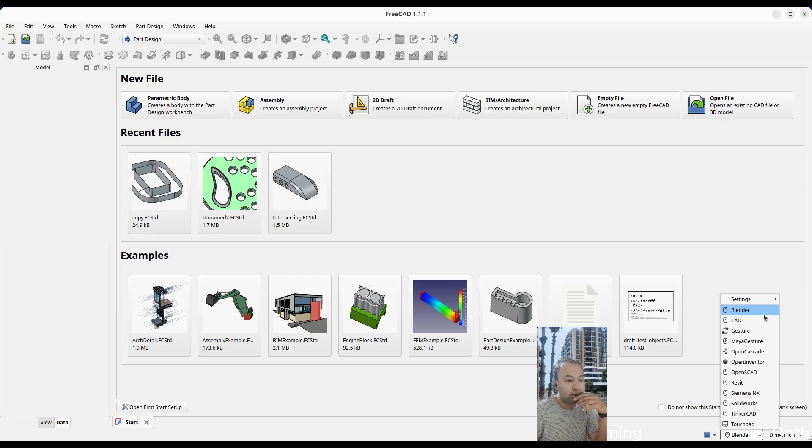First thing, when you open up FreeCAD, you'll be setting it up - customize it to your liking. At the top, if you hover the mouse here, you can see I have currently selected the Blender style of navigation for the 3D navigation. You can click here and choose to your liking which one you like - if you like SolidWorks style, you could choose SolidWorks. I like Blender style, so that's what I've chosen. Also, in the dimension settings, you can choose what kind of standard dimension units you're gonna use for your design and drawing.

So I leave it to the standard, which is millimeter kg, and here as well, so you don't have to worry about that one.

The first and second thing you'll be doing is going to the edit menu and then the preferences, and go to the general tab. I've set the number of decimal places to 3. I'd like to work at 3 decimal places, like a microns level, since my background is mechanical engineering. If you're a civil engineer, the default is 2, but I guess 3 is a very good number for this software.

Then in display and 3D view, you want to turn on anti-aliasing if you have a good graphics card. This software isn't very heavy unlike other commercial CAD packages, so it doesn't require a lot of horsepower for your graphics card or CPU. You can boost some of the settings for anti-aliasing - if your computer can handle 2, set it to 2. I set mine to 4, though I could even set it to 8. Anti-aliasing affects how the shape looks, so it doesn't have jagged lines.

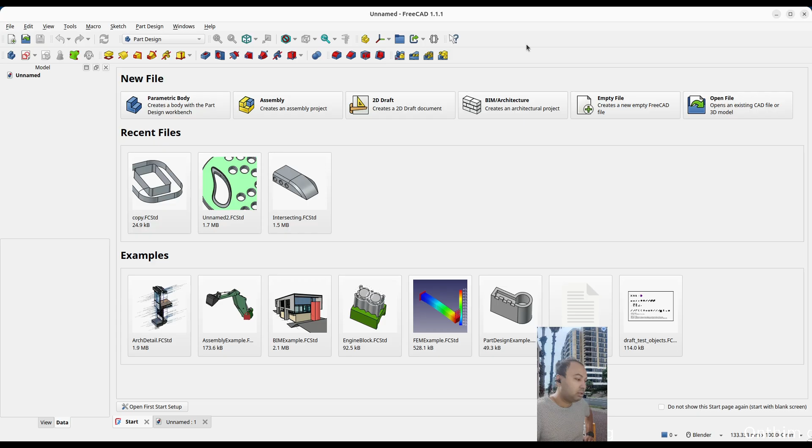And then you can go to the start page - this is just the introduction page. I can switch between documents, let's say I'm working on multiple documents, they'll all show up here. So it's very easy to switch between different documents in this software. Even though the interface looks a little old school, it's very convenient.

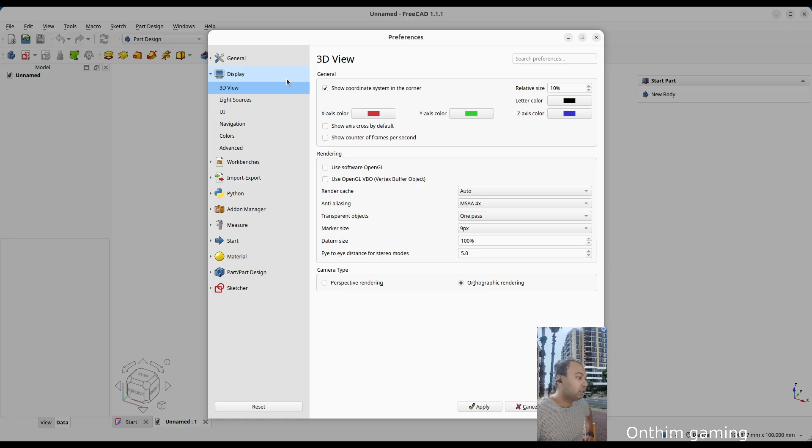As you can see, I have the navigation cube here at the bottom left. I forgot to show you something for the navigation cube - you can check this option, enable spinning animations. I like that, so when we change to, let's say, top view, it will be animated nicely.

Since I'm using Blender, I could use the middle mouse button or scroll button to rotate my view. As you can see, the cube is also rotating. I can choose front view. This is the viewport where the 3D drawing will be created.

So if you're working on 3D mechanical design, what you have to do is use different workbenches that are available. A workbench provides tools for you - you can think of it like different garages or different labs where you'll find different tools available. So a workbench is kind of like a lab, and each workbench has different tools available to you to work on your project.

So you can switch between different workbenches, go into different labs or workshops to work on your part or design. You can bring that part to different workshops on different workbenches, or labs.

So here, if you click in here, you can find all the different workbenches available. By default, there are a number of workbenches available. You can add new workbenches as well. That's the beauty of FreeCAD. If you go to Tools and Add-on Manager, it will connect to the internet and show you all the extra workbenches available for you to download and install.

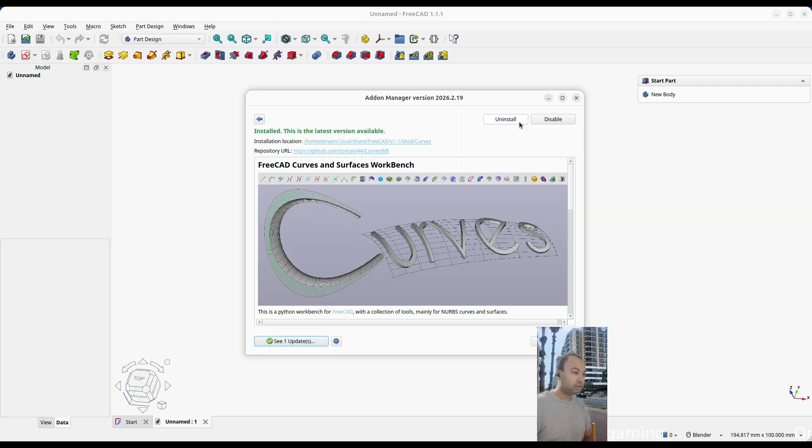So here you can search. This is still loading. Once it's loaded, I can search in the search box. I'm searching curve here. So Curves workbench, I have installed that one. That is a very important workbench if you're working with curves or organic shapes. It's kind of like a surface workbench in FreeCAD. Surface workbench, surface module. In SolidWorks, it's called module, I guess.

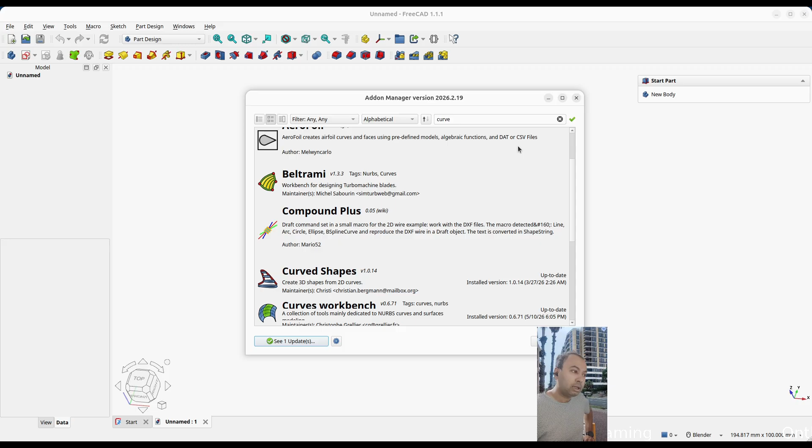So Curves workbench is a nice one. It's not installed by default. You just have to install it by going to Tools. Anyway, it's available here. As you can see, I have added a few other workbenches like Curved Shapes and Silk. These workbenches allow you to work on your own design. They give you different tools to work on your part.

A very nice workbench is the Part Design workbench. It's a mechanical workbench to work mostly on mechanical solid parts. So we're going to use the Part Design workbench. I'm inside that workbench. I want to create a body first. That's how it works. These are the tools available in this workbench provided by Part Design.

To use any of these tools, you have to create a new body, and this is what is shown here. You can start a Part Design body, or you can just click in here. Now, as I clicked on that, the project tree shows what my project has. My project is unnamed because I haven't saved it. You can save it, but it's okay, I won't save.

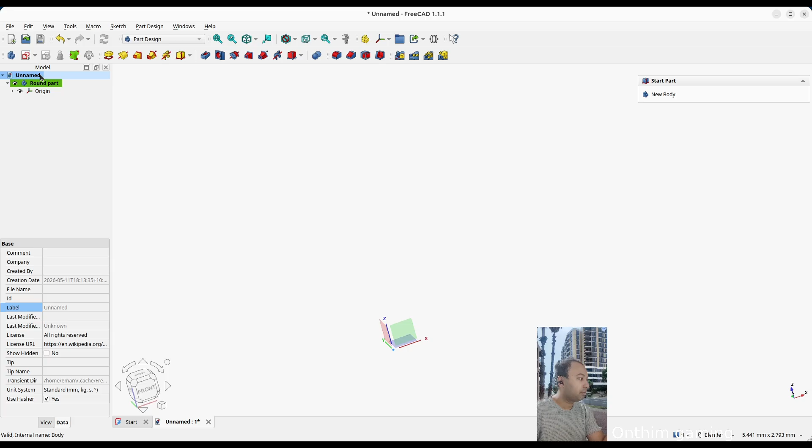And also you can see this is the document, which still doesn't have a name because I haven't saved it yet. So this is the document. Inside the document I have a body. And if you look at the properties of the document here, it has some data properties you can set, like created by. You can change this and it will be saved in the file.

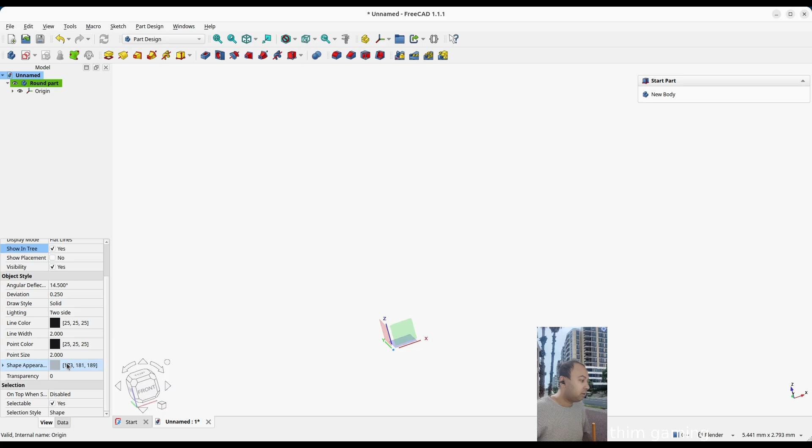Company XYZ, you can say, in the comment, and the creation date, of course, is automatically set. File name: it doesn't have a file name because we haven't saved. ID, label, you cannot change the label, it's related to file name. License, all rights reserved. So these are the view properties as well. You can change the view of that document right here, just like the body. So you can see it's dark bold. The body is dark bold, the document is dark bold. That means it's selected now.

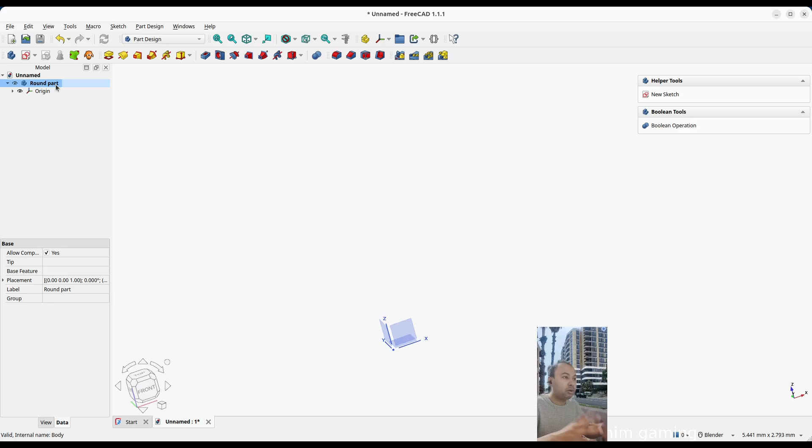So now let's build something. So I'm inside the body. What can I do? I'm going to create a sketch, and I'm going to extrude the sketch to create a solid. Right. So I'm inside the body. I can use the sketch tool here. New sketch, while I'm inside the body, right? And now, as soon as I click that, this comes up. That means it's asking me on which plane I can draw that sketch.

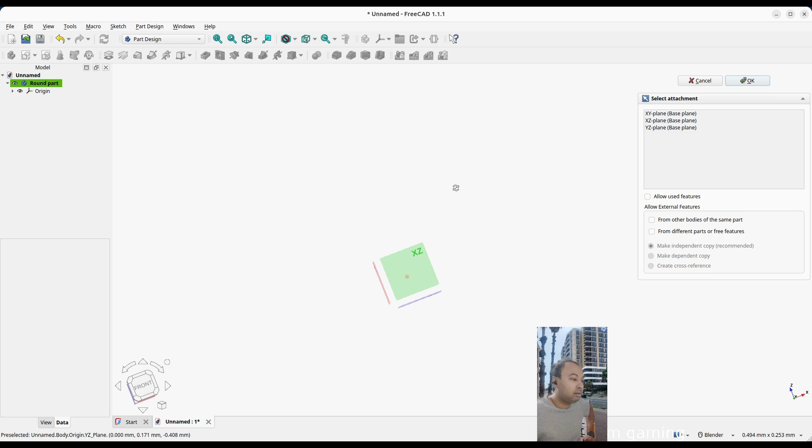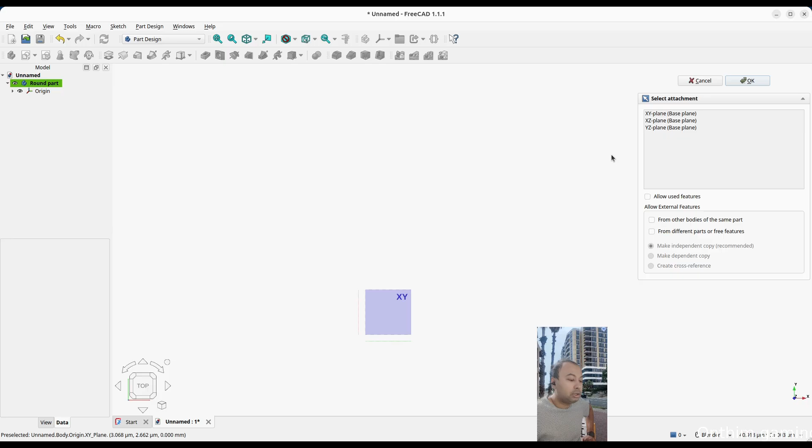So I can see here the navigation cube for which plane, right? I can just click on the top and then click on this one, fit all view, so fit everything within the view. Or I can choose from here. So top seems like XY. So I can choose from here where the sketch will be drawn, right? XY. I can select from here and it's selected here, you can see. Let's do XY and OK.

Now you can see as soon as I click that, this has changed. The available tools are now different, and also the workbench is now the Sketcher workbench, because there's a different workbench to work on the sketch. So it gives you a line tool, circle tool, arc tool, and things like that. So it's different from the Part Design workbench. And as you can see, in the project tree a new sketch item is created, which is not selected. We can select that one.

Now I'm inside the sketch. You can see because I'm in the Sketcher workbench, and also you can see the first button on the toolbar is leave sketch. So when I'm done with the sketch, I'm going to click on that one, leave sketch, to exit the sketch. So here on the right, you can see the list of items I'm working on in the sketch.

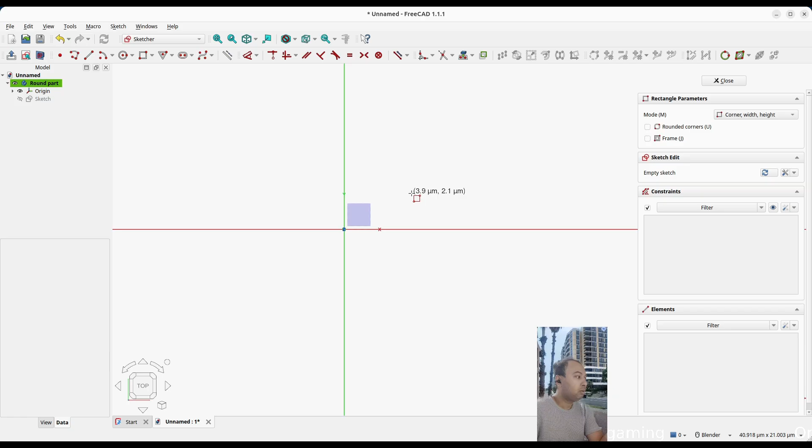So let's draw a rectangle. I can use the rectangle tool, and you can see as soon as I click on the rectangle tool, my mouse cursor has changed, right? And it's also giving me some options on the right panel here, whether my rectangle will have rounded corners or not, or whether it will have a frame or not. So I'm still in the rectangle tool. If I want to cancel, I just press the escape key on the keyboard. Now my cursor is back to normal.

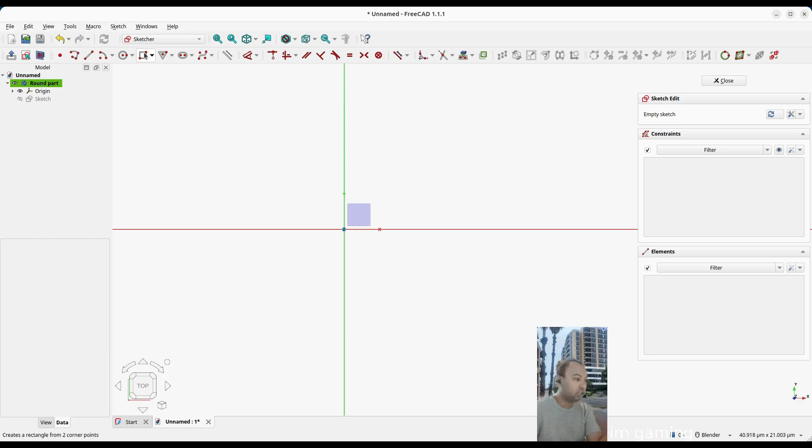So you can see the empty sketch. That means my sketch doesn't have anything inside here. So let's create a rectangle here. These are the axes, right? I'm in the top view. So the green one is, I suppose, the y-axis, and the red one is the x-axis. And you can see little lines here as well, X and Y.

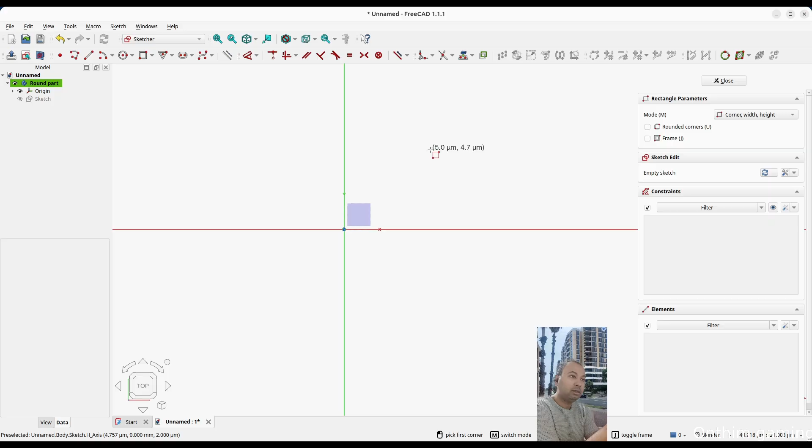And as soon as I hover my mouse on the y-axis, you can see the cursor changes. It's now showing something round and a dot. That means my drawing is going to connect to that y-axis. And as soon as I come to the x-axis, it also changes the cursor. You can see the arc and dot. But if I move away, there's nothing. So you have to be mindful when you're drawing a sketch whether you want to connect your sketch to some other elements or not.

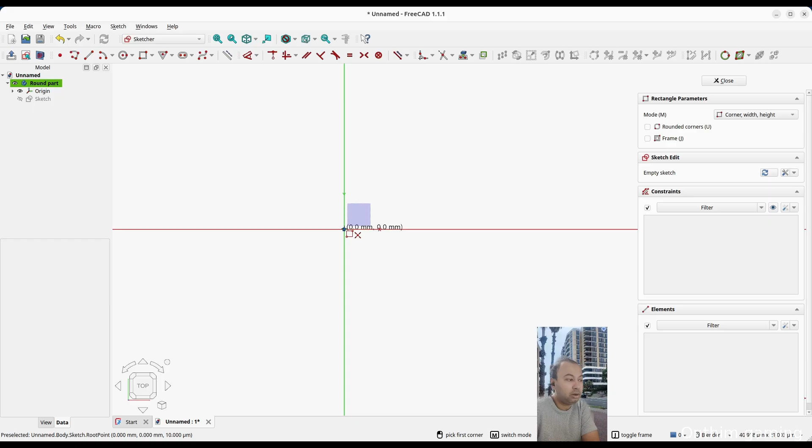So it's very important that you observe the mouse cursor in this software and then work. This is the origin, you can see. As soon as I go to the origin, it has a cross and the dot. That means I'm coincident with the origin. So I'm gonna click on here. So my rectangle is coincident.

One point of the rectangle is coincident with the origin, and as I'm moving the cursor, I can define the dimension for my rectangle. I can simply click on the view to define the endpoint of this rectangle. You can see it's showing how the rectangle would look like. Or I can use the tab key to define the dimensions, and you can see I'm switching between the horizontal and vertical dimension. Let's say vertical, I want to set it.

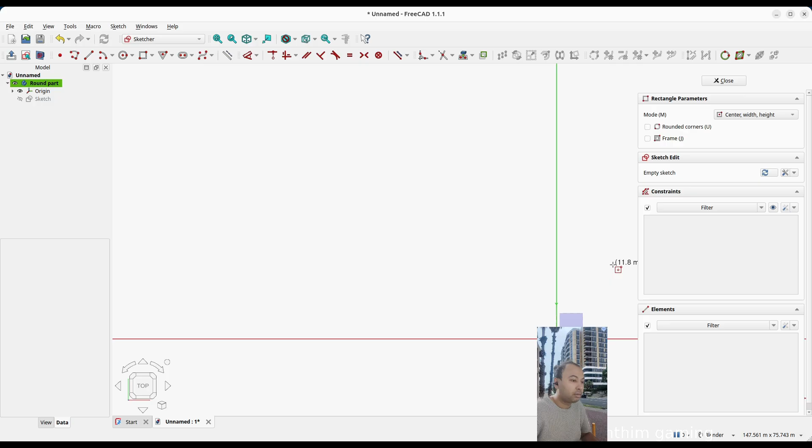So this is not fixed. I'm not fixing the dimension, I'm just defining it. I'll show you how to fix it. So let's say vertically, I want to go 40 millimeter. So I can use the delete key. It looks like it's going out of the view. Just click on here, 40 millimeter, and just click on here. It goes out of the view, and just use shift key.

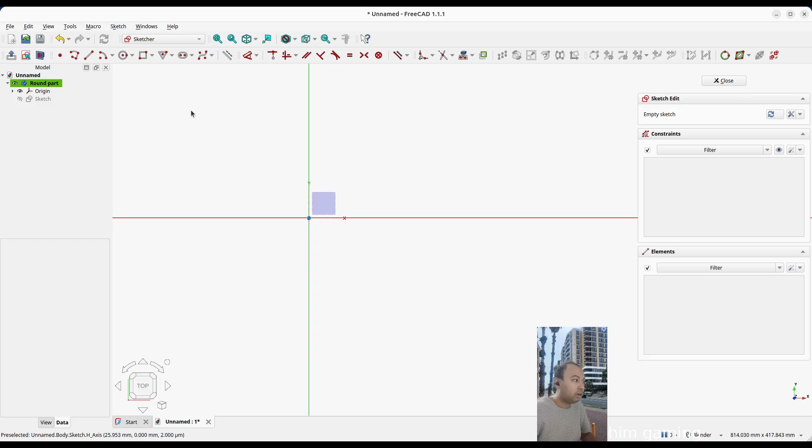Seems like this is kind of the problem. You will see I pressed the escape key to cancel. So what happened? Because I zoomed in so much or zoomed out so much, it cannot contain it. So this kind of problem you will face. So clicking on the rectangle again at the origin coincident, and as soon as the cursor changes, I click, and as you can see now it's within the view, and it's showing in millimeter.

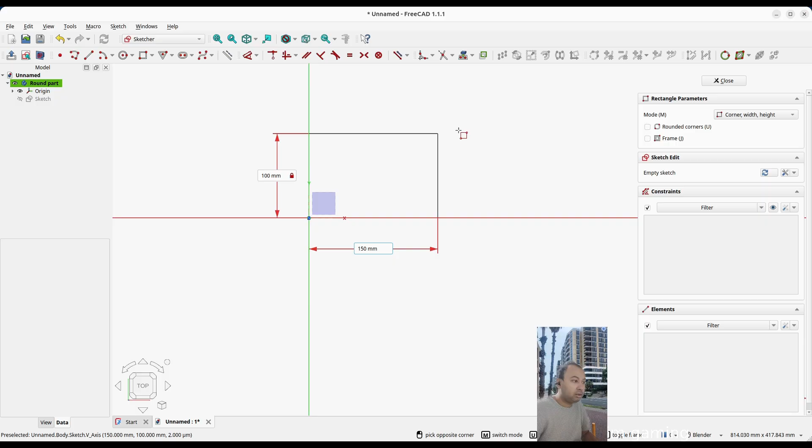So let's set this to 40 millimeter or 100, and this one 150. And I can click or just enter. Now a rectangle is created, and also the dimensions are set because I used that tool. These are the dimensions, and I cannot change the shape anymore. If I drag the rectangle sides, see, it doesn't change. Same if I drag the points of the rectangle, because these are the dimensions which are set already.

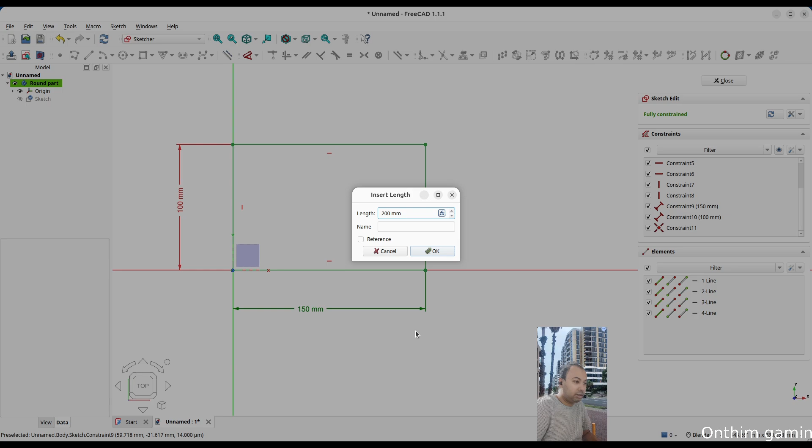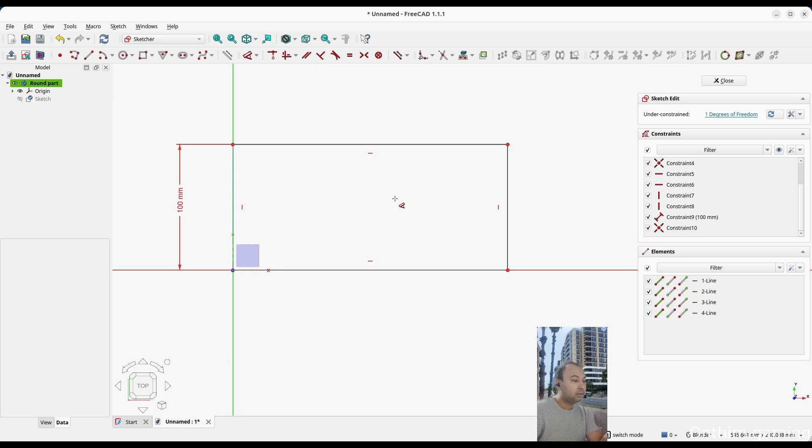I can double click on the dimensions and change it, and it's changed. Or I can click on the dimension and press delete to delete it. Now as I delete it, I can change the dimension by clicking and dragging the mouse. So the other tool I want to use is the smart dimension tool here. So I click on the side, it's still hovering, and then click it, 200, and it's set. And then the whole rectangle is now green color. That means it's fully constrained.

And on the right panel, you can see I have four sides for this rectangle. As soon as you select the elements from here, it will be shown in the view as a blue line. And these are the constraints I have for this rectangle. So it's coincident with the origin, so that's fine. So if I want to leave the sketch now, just one rectangle is fine. I can click in here, leave sketch, or I can click on close.

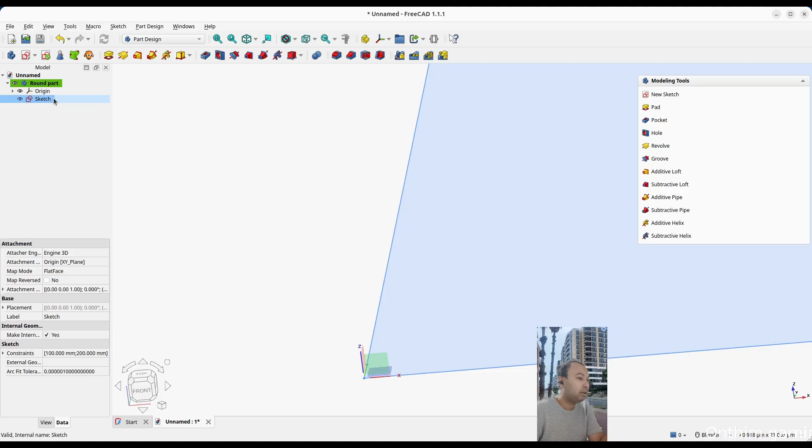You can see the view. In the project tree, I have a sketch now, which is visible and which is inside the body. I can select the sketch. Let's zoom to fit so that the sketch is visible in the view. In the origin, let's hide the origin. This is the sketch I have. To extrude the sketch, it's very easy. Just use the pad tool.

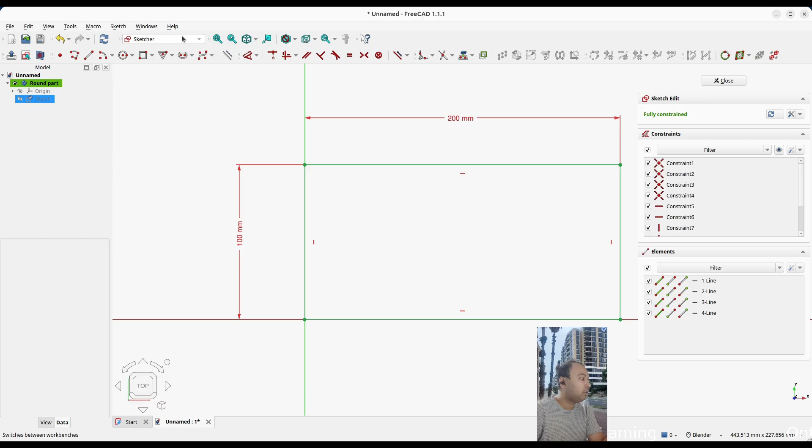Now, if you notice, I'm again inside the part design workbench because I'm not editing the sketch. So sometimes it will switch to the desired workbench automatically. If you right click on the sketch, I can edit the sketch again, and I'm inside the sketcher workbench again, or I can leave it from here. I'm going back to part design workbench. While selecting the sketch, I can use the pad tool to extrude the sketch. The sketch has to be fully closed, just like in any other CAD software; it can't have an opening.

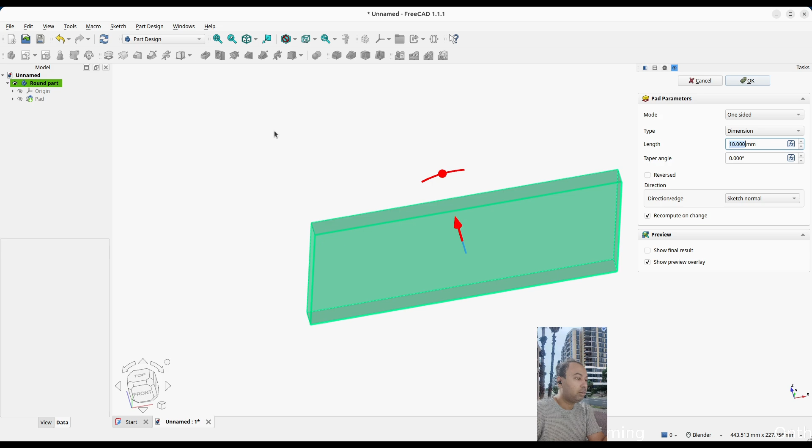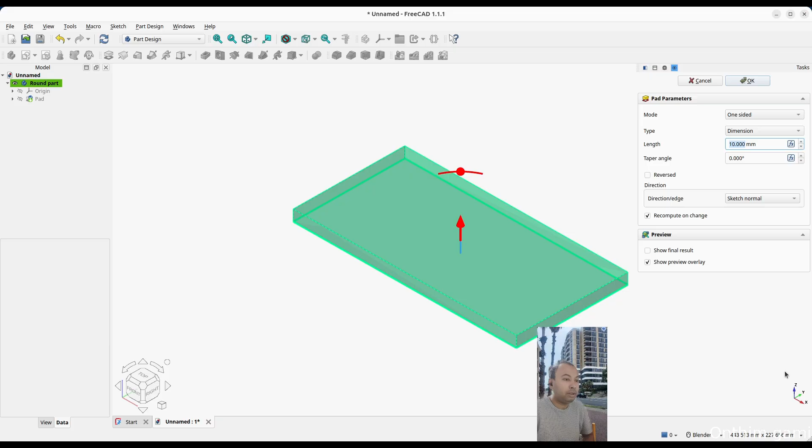Just select the pad tool. Now you can see. So let's switch to the isometric view. Click on that. Or if you press 0 on the keyboard, it will also switch to isometric view. And the view now is showing a preview of the extrusion. The length, you can see on the right panel. So any operation you do will show up here on the right panel.

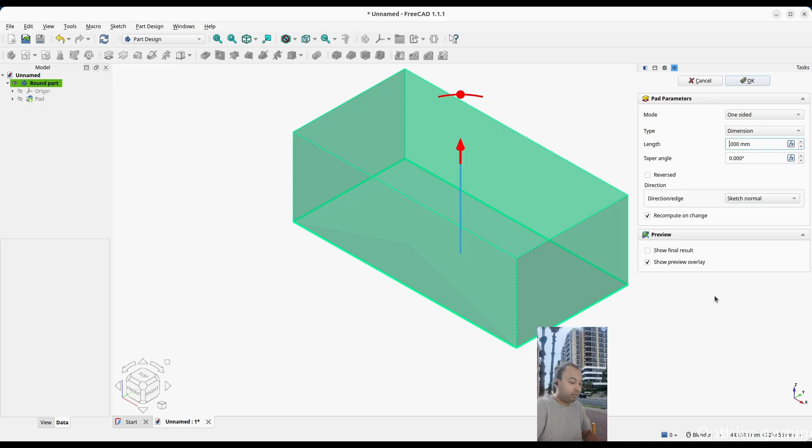So I can drag the red gimbal or whatever it is to change the dimension. You can see the right panel is changing. Or I can just right away enter here. Let's give it 20. And also I can give it a taper angle if I like. So kind of drafting, right? Giving it a draft, a 1 degree draft or 2 degree draft. I would like a 3 degree draft, for example, inside.

It's an outside draft. If you click here for the front side, yeah, the draft is going outwards. I can give it a negative draft here, so it goes inward. That's the front view. Again, if I want to go back to the isometric view, I can click here. So this is still a preview.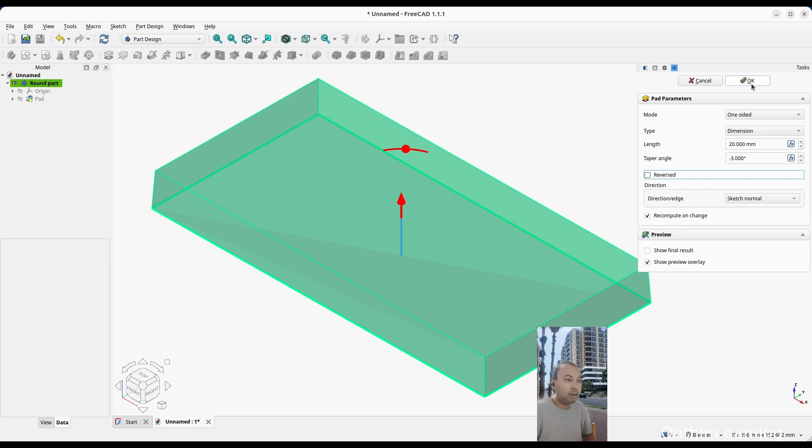And then you can choose extrusion sides, like one sided, which only goes in one direction, or what kind of extrusion, a dimension extrusion or another type of extrusion, or you can choose reverse direction in that axis or not, sketch normal direction, and press OK. Now you can see the extrusion is complete and the solid body is created.

And in the project tree, I can find the pad, the operation we did, which is here now. In the data tab properties, you can give it a name. Let's say body of my part. But this is a pad, and you can change the settings of that operation as well. As soon as you go to the data, all the settings are available.

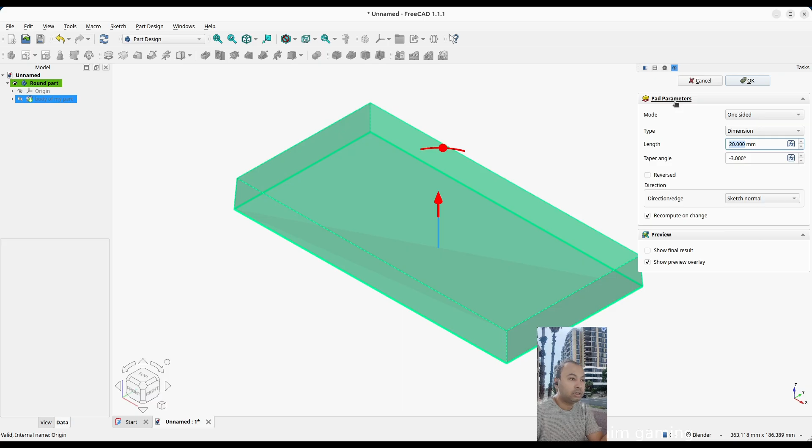So this is very convenient compared to others, like SolidWorks, where you have to right click and then edit the properties of that feature. In SolidWorks, they call it a feature. Here it's an operation you did, and it came up here as a project element. You can right click and edit, then change the properties, or you can directly change the properties here in the data properties or view properties. So it's very easy in this software.

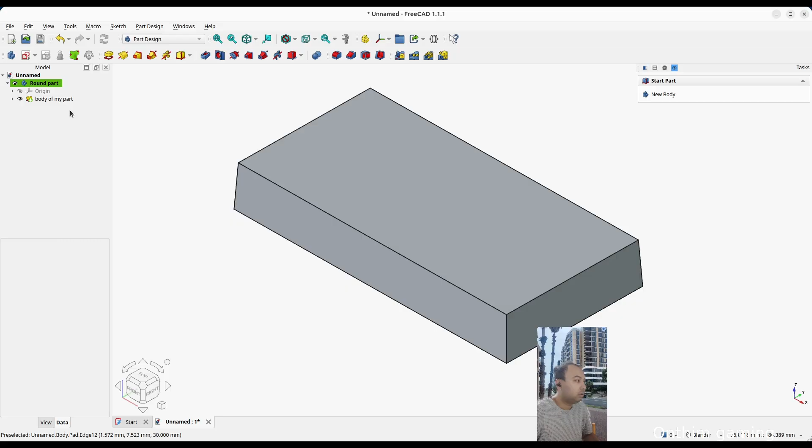Let's say side one. Now you can see it immediately changed, and then offset, up to shape and all that. So all the settings are available here, even the settings which are not available in the edit pad. There you will not find all the settings, but if you come to the project tree and then properties, you will find all the settings related to that operation or feature.

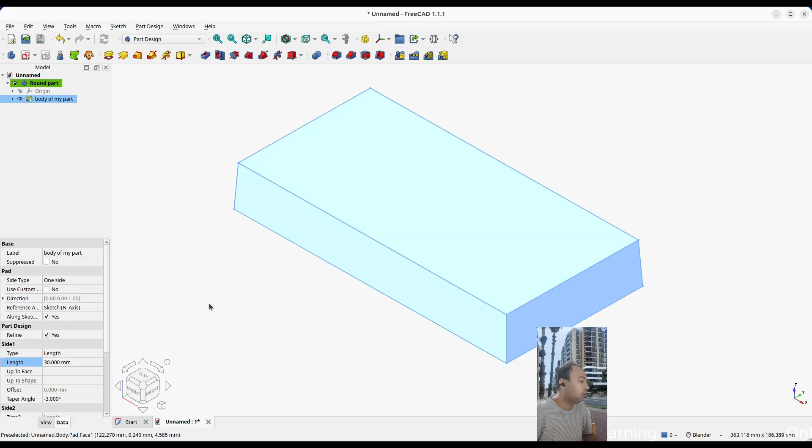You don't have to double click any operation, but any body you have to double click to activate it. You can see it's bold for that body. So now this is the body, and you can open up the body and see it has one sketch. That operation depends on this sketch. I can open up that sketch, right click and edit the sketch again to make any changes.

Let's say I want to change this side to a fillet. So I'm going to select this side and then this side. Let's see if they have a fillet tool here. You cannot find all the tools in the toolbar, so just go to the menu. Every workbench has its own menu. So sketch, geometries, and here I have sketcher tools, fillet. I do have fillet.

As soon as I click on that one, my cursor has changed. This is important in FreeCAD. Sometimes it's not very visible. As soon as I hover the mouse on this side, it gets darker. Notice those things very carefully. Unless it changes the appearance, don't click it.

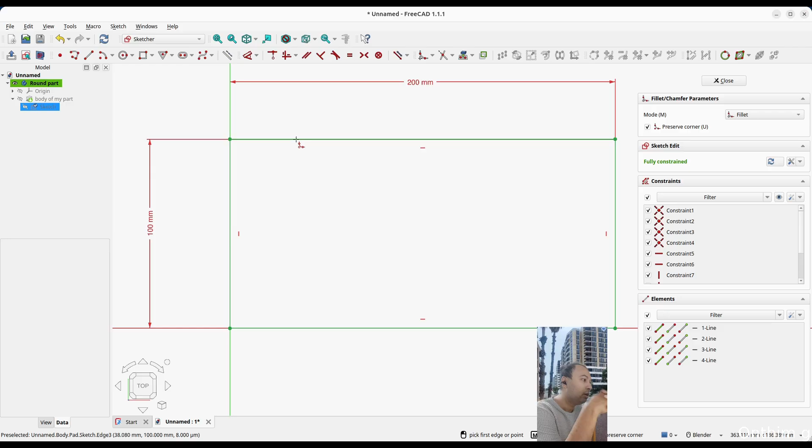This is why for many people coming from SolidWorks, because SolidWorks has some kind of smart correction, here you have to be very careful when you're clicking. The cursor is not changing, but the side has changed color. It got darker. Now I can click, and it's selected. And again, coming back here, it got darker as soon as I moved close. And that's it. I just applied the fillet, and you can right click or press escape to exit that operation. So this is the fillet.

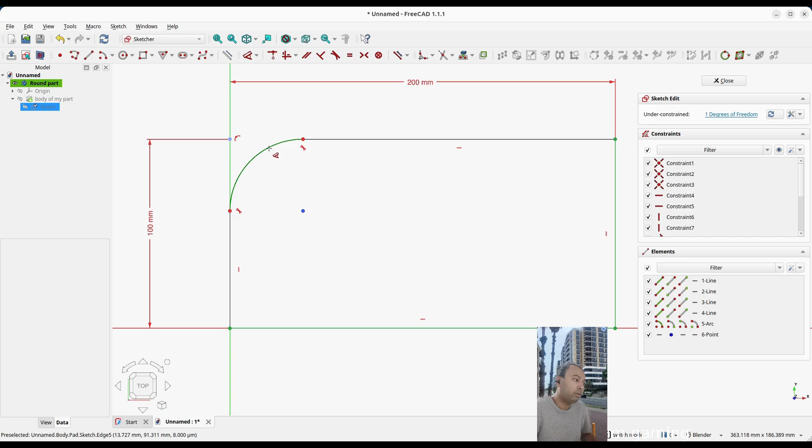I can use the smart dimension tool here to set a dimension. Just hover the mouse over and click on it, click again, and then this will show up. Let's say 40, and then right click again.

So this is where this software is very good. To exit an operation, just right click. In SolidWorks, I guess you can't do that. You just have to press the escape key or some other way. Anyway, so this is good.

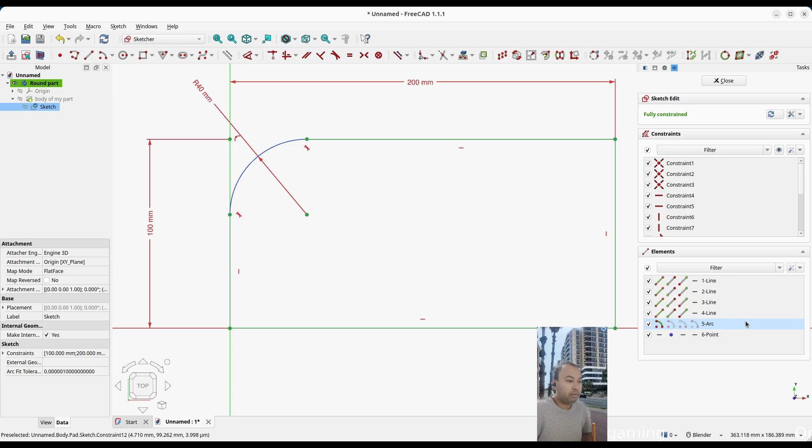It's a fully constrained sketch, and I can see what I have here for this sketch. It has a point. I don't know which point it is, but you can see the color of that point is a different color. That means it's construction geometry, so it's not going to interfere with my sketch or shape.

If I close it, now you can see immediately. That's what people mean by parametric design. My solid has changed. My extrusion is based on the sketch I just changed, and it's working fine. You can easily do changes.

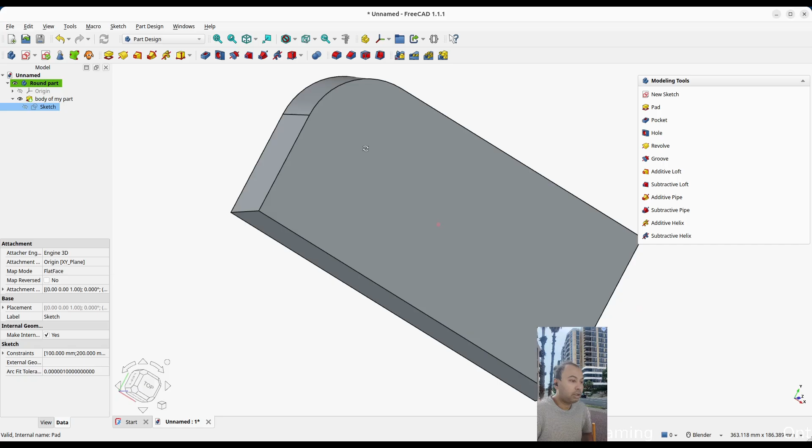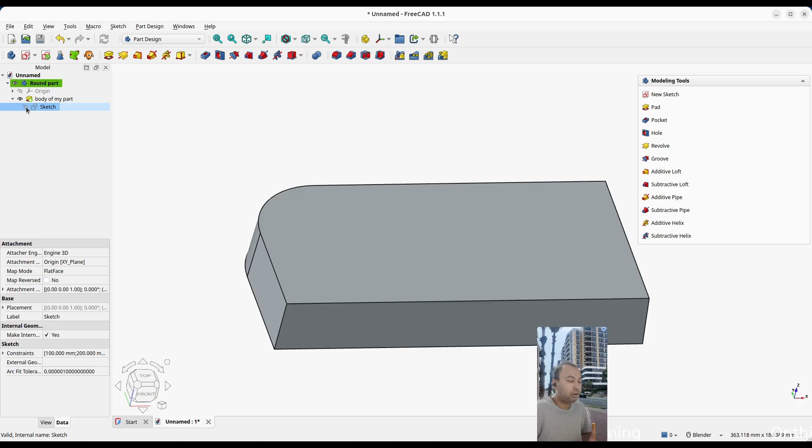If I go to the front view, let's rotate this view. And you can see I still have that draft applied to it. So all the settings are preserved, and you can see the sketch here. It's not visible because it's automatically hidden, but you can make it visible with the space bar, and you can see that it's now visible as a blue color.

Or I can right click on the body and then toggle transparency. I can make the body transparent, and you can see where the sketch is. It's very useful sometimes. Then right click and toggle transparency again. Okay, that's fine. And I can hide the sketch if I want to with the spacebar. And it's inside the body.

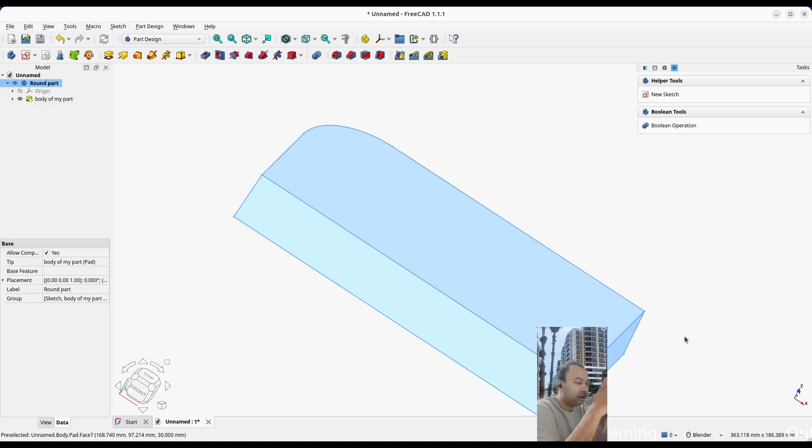So this is the project. In FreeCAD, everything is a tree, one inside another. So it's not a linear design model like a linear project tree. It's more like an actual tree. That's the difference you'll find if you're coming from SolidWorks. It's not a linear tree.

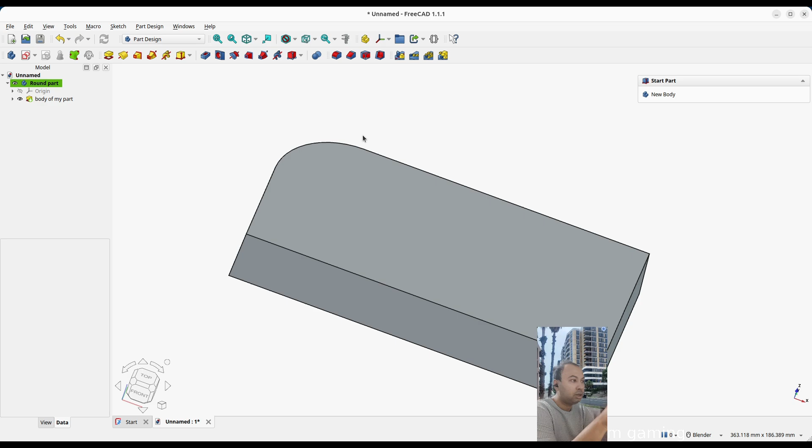I can have body inside part inside part, so I can have another level of body inside that body. You will see that especially when you're working with multiple workbenches. If you stay in the same workbench using its tools, maybe it's linear. But as soon as you start using features and bodies from one workbench in another, it's going to be more like encapsulation. So that's the difference you'll find.

Let's say I want to apply a chamfer on this edge. Just click on that. As soon as you click on it, you can see it selected here. Now the body is not selected, but as soon as I select that edge, you can see the body is also selected. So that's how you know it's part of that body. You could have multiple bodies, by the way. I can click on the document and just create a new body.

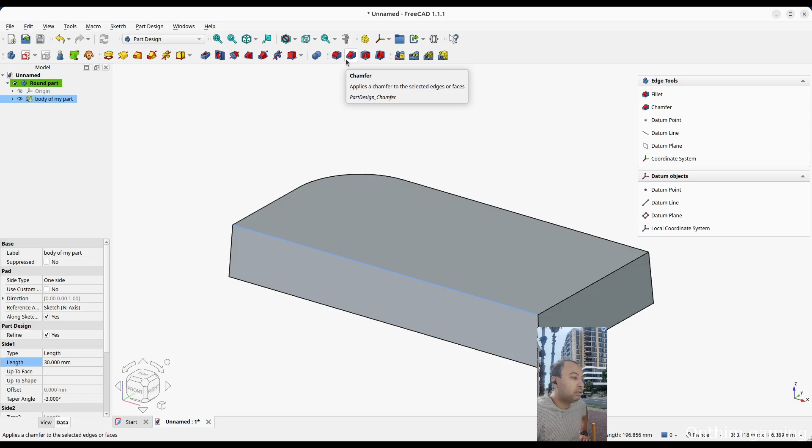So on every body I can do several operations. As soon as you click here, you can see the available operations. I can use the fillet, I can use the chamfer, and these are also available here. Let's use chamfer on that edge. Again, for that operation, you can see the options available here. I can drag the gizmo to define the dimensions of that chamfer.

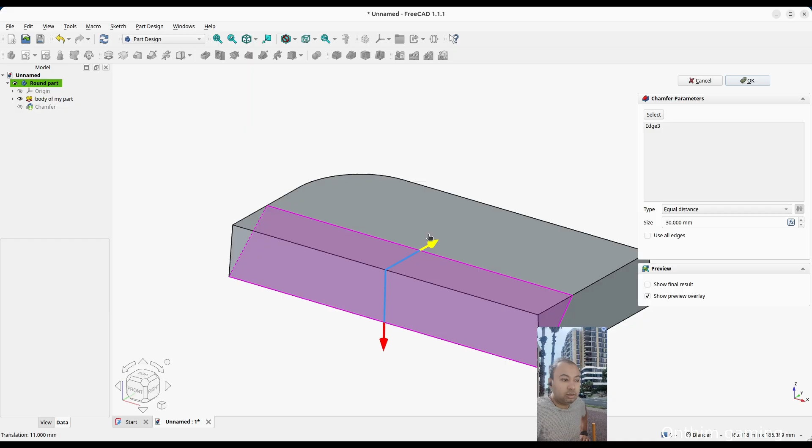And another thing you will notice, as soon as the dimension matches the height, what's happening here? In SolidWorks, I can have a chamfer bigger than this edge, right? So we have an extrusion of 30. Let's cancel this chamfer. On this edge, I'm trying to create a chamfer more than 30. You can't create that in FreeCAD, so you have to think about some other methods.

So why is this happening with FreeCAD? Because edges are very important in FreeCAD. As soon as this chamfer is created, this edge and this edge will be created, and this edge is going to touch this edge, kind of intersecting. That's why you cannot create a chamfer bigger than that. It always has to be less, which makes sense, because in the real world, working on a solid, you can't really do that.

So when you're working with FreeCAD, think about whether doing that kind of operation in the real world is going to be hard or not. If it's going to be hard, that means it cannot be done in FreeCAD.

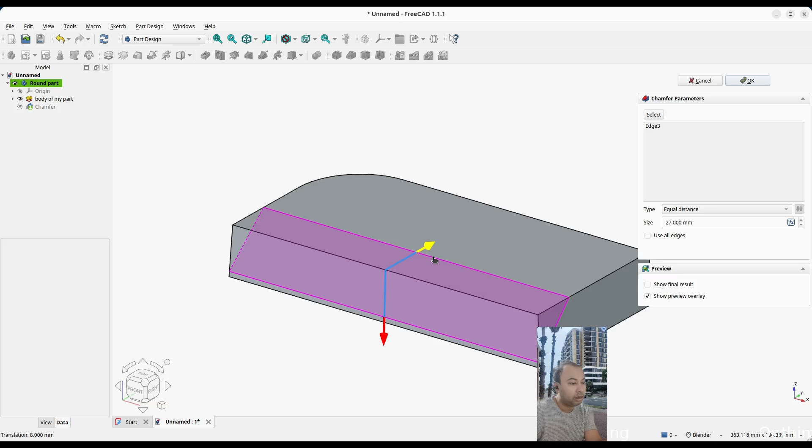So FreeCAD is a good example of real world operations. If I want to chip off this material to create these corners, the sharp corner, to create that chamfer, how much can I chip off? I cannot go beyond that edge - it's gonna be very hard physically, but less than that it's easy. I'll show you how to do it anyway, but you have to think about a different process.

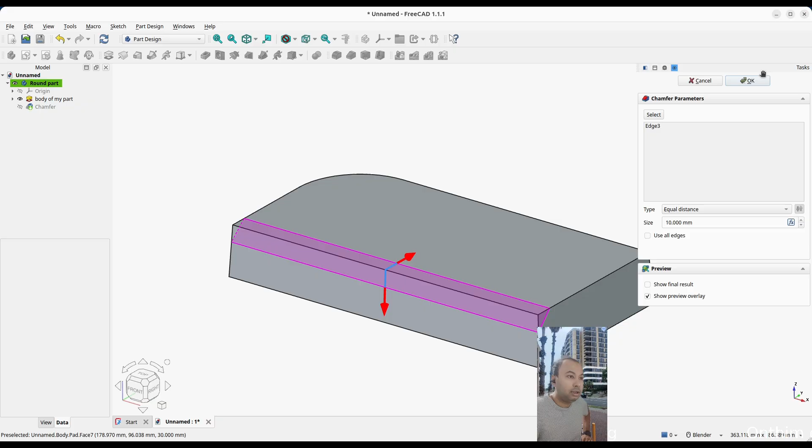Let's set it to 10 - that's a good number. Okay, and you can see a chamfer element is created and my body is hidden now. Why is that? This is the difference - this is why FreeCAD is different from SolidWorks. It only shows the last process or last operation you did, and the outcome of the operation is encapsulated.

So chamfer is not just chamfer - this part is the whole body. The operation of the chamfer resulted in the outcome of this body, so that's why chamfer is shown as the whole body. I can hide the chamfer and the whole body vanishes.

That means I can switch back to the body and show that. So the body created that extrusion, that's the outcome. I can also show the chamfer outcome - as soon as you select one, the other is hidden automatically. But in some instances, you can show both outcomes.

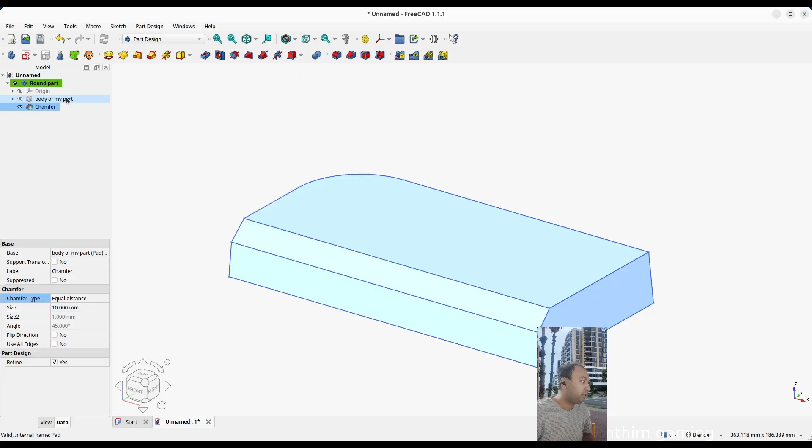So in the chamfer, it doesn't have a sketch, and you can change the properties here as well, as usual - very easy. Whether equal distance, chamfer type, distance, distance and angle, flip direction, edge - already fine, yes. And then view, even the view, as well. So the outcome of the chamfer is this from the body.

I can go back to the body - just right click and then set tip. Now I am in the body. Anything I do now in the project tree, the chamfer will take that into consideration when you set the tip. So let's say I want to give this edge a fillet...

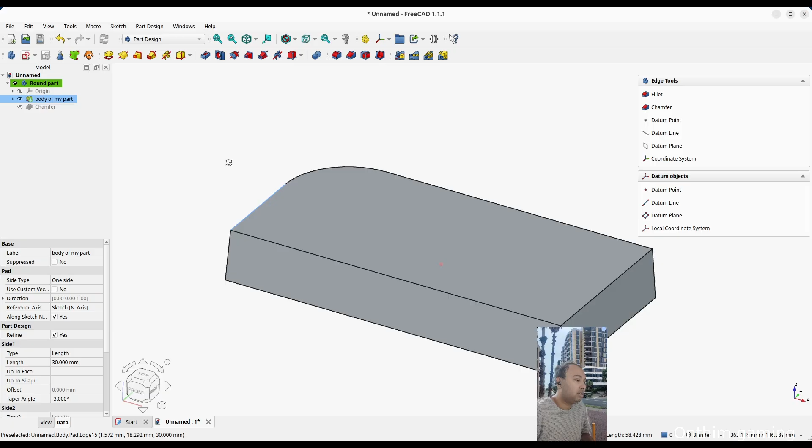No, chamfer, let's say - let's see if it works. As soon as you select that, you'll see the whole thing is selected, because you can't simply do that one in the real world - it will create an invalid shape, kind of. See, it has to sweep all the way along. So in this operation, you can see this edge is selected, and you can select other edges as well, and it will come into that list.

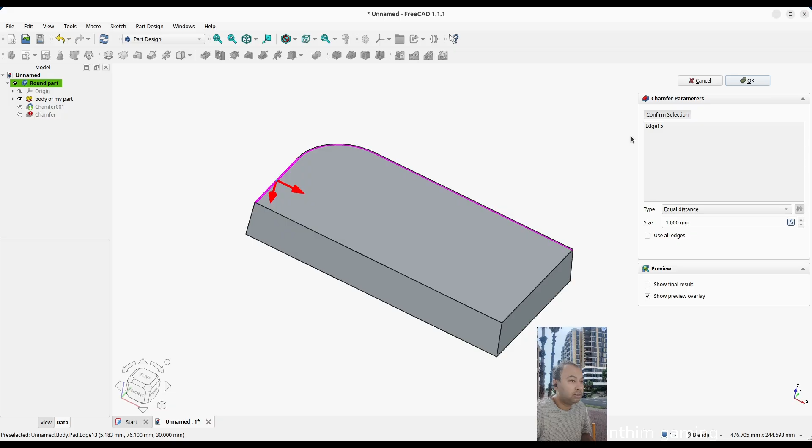The face, no, I don't want that, so let's remove that. Or I can remove everything. And again, select button, I can select this one. So select - you can see the purple showing the expected result. Let's say 6 is okay.

And you can see here what happened. After the body, this new chamfer is created, and there's the outcome. The old chamfer comes after that because we have set the body to the tip of the operation. And the reason this chamfer is failing is because now it doesn't know which body to work on - it could not find the old body, which was the body, right?

So we can go to the edit chamfer - you see, it's expecting that edge, but it doesn't. This edge doesn't exist, so we just have to remove that. Let's say select.

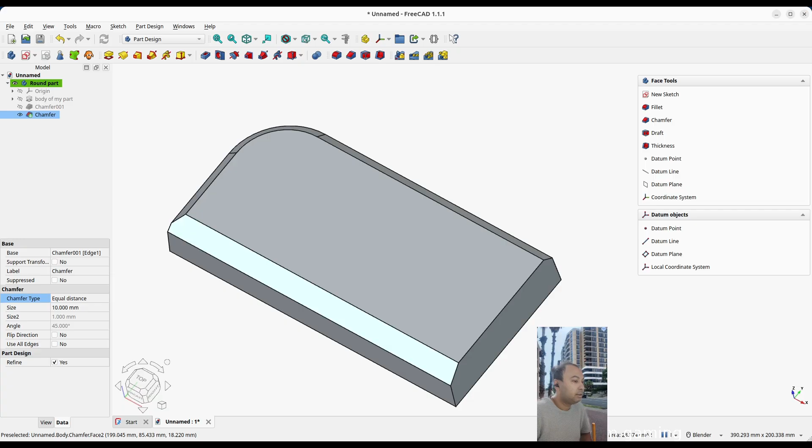Why is it not visible? Because we are in this edge of body, not the new chamfer. So we have to set the tip there, and now you can see that chamfer is applied. So this is very parametric - you can go back to the project and do some other changes, and your original later operations still work. So this chamfer body contains the whole body - it's not just the chamfer.

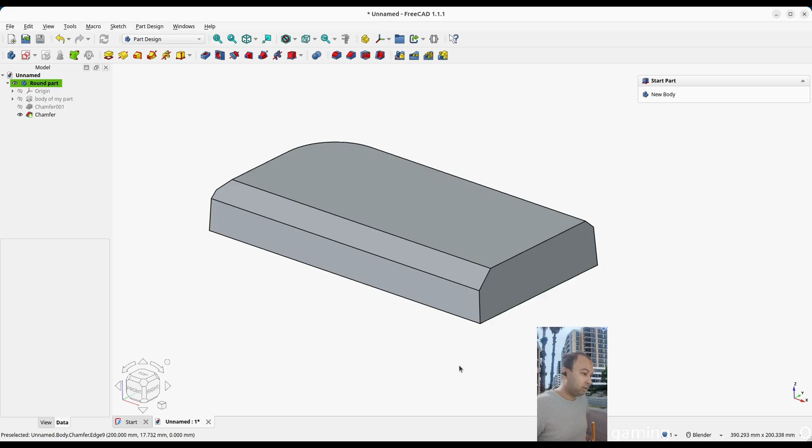So that's all. Like I said, I want to do a bigger chamfer than this - so how do you go about it? It's very easy. We just create a sketch on this. Let's create a new sketch - we're gonna remove material from that side to create that bigger chamfer.

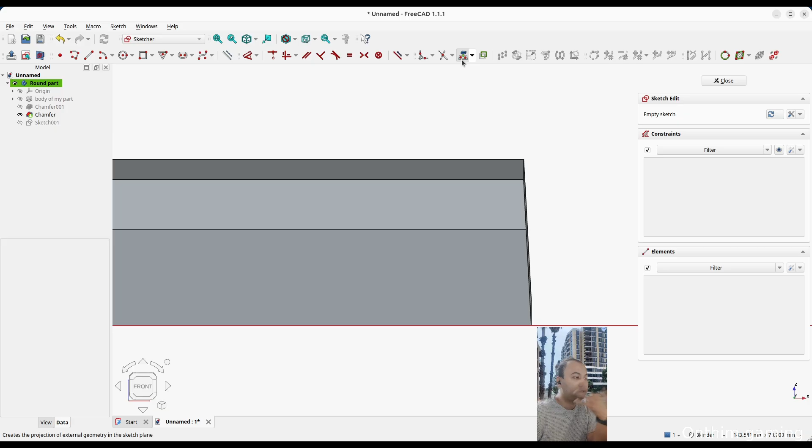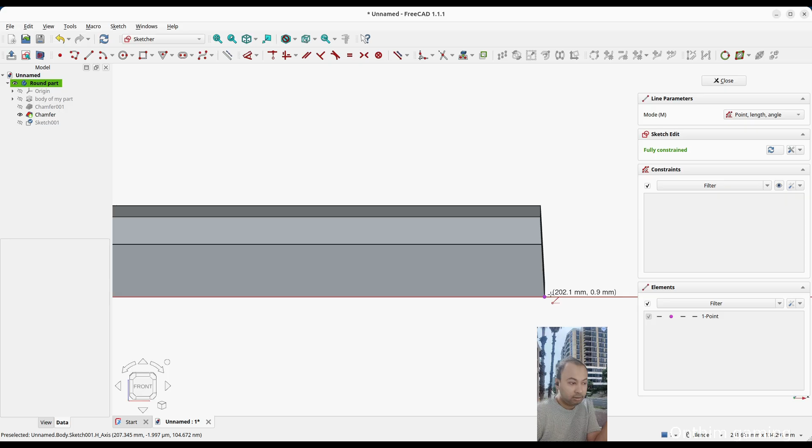Create a new sketch, and it has that chamfer. So I want this point to be imported so I can define the chamfer. You can use this external projection tool, which will import that point - you just have to roughly click it. The cursor will not change, and as soon as you click, you see a point is imported. So now I know I have a point to work on. I can use the line tool, and you can see the cursor should change to coincident cross.

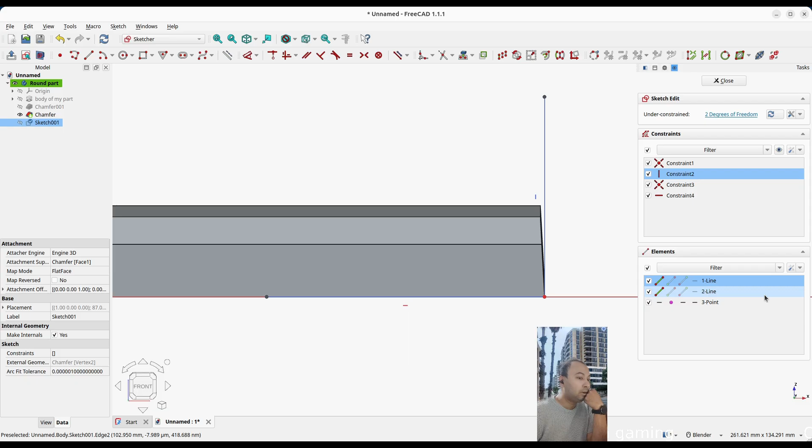So these two lines which are created here, you can select multiple by shift from here. Let's make it a construction line. You can toggle make it construction line by clicking on that. You can see the dash line is a construction line now.

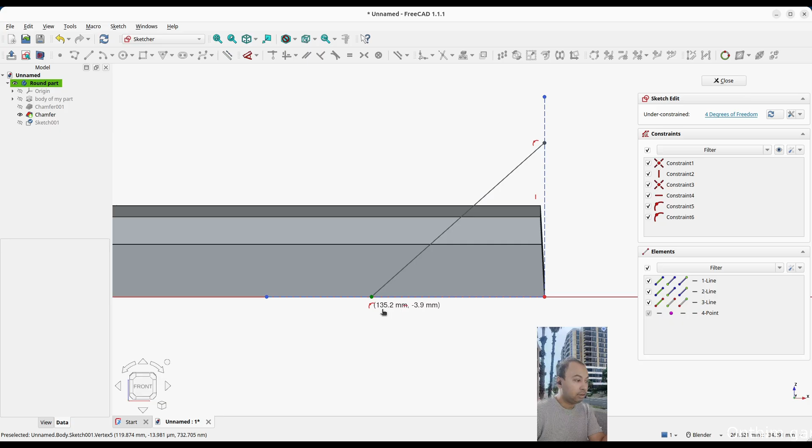I'm gonna create another line, and you can see here the cursor changes to arc and dot. That means the first point of that line will be on that line. Same thing again, cursor changed to arc and dot. You can see it can drag, and then it just stays on that line. That's what we want.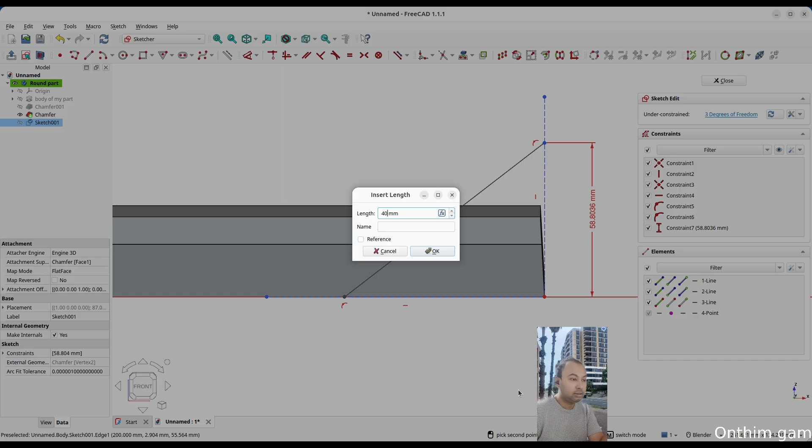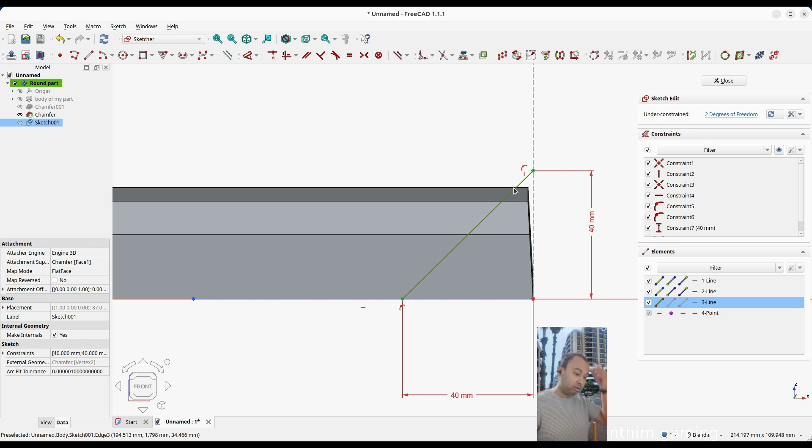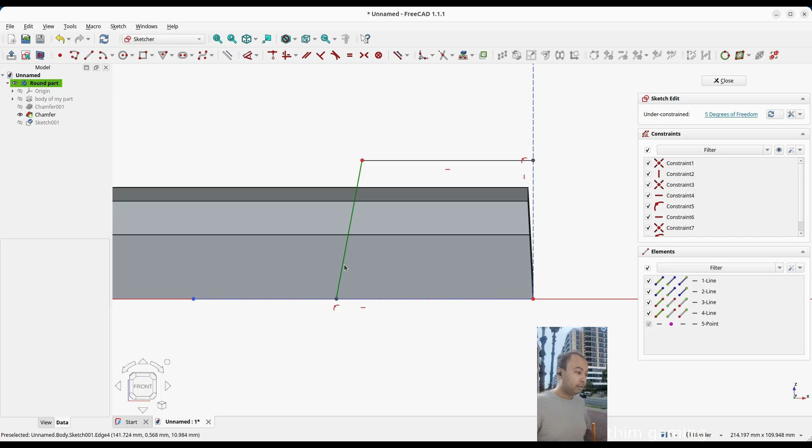So I can delete it, actually delete it, this is not needed. Again, on this line, I create a horizontal line, and then coincident from this point, and you can see the cursor falling on that line. Selecting this one, vertical constraint - it already has horizontal constraint.

I can turn this one into normal geometry by clicking on that. So also I can turn this one. All I have to do is click on this point and click on this point. Let's say make this one coincident. But see, this is not working. Sometimes constraints will not work.

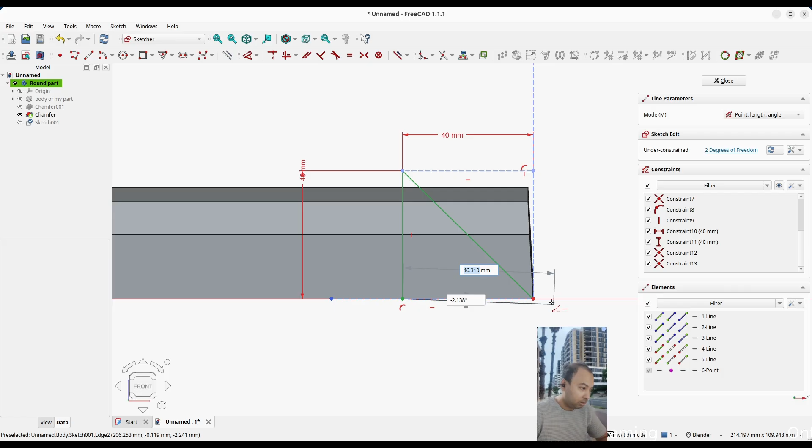You just have to delete the last constraint from here. So it cannot be constrained. In that case, I just create a new line from here, and a new line is created there.

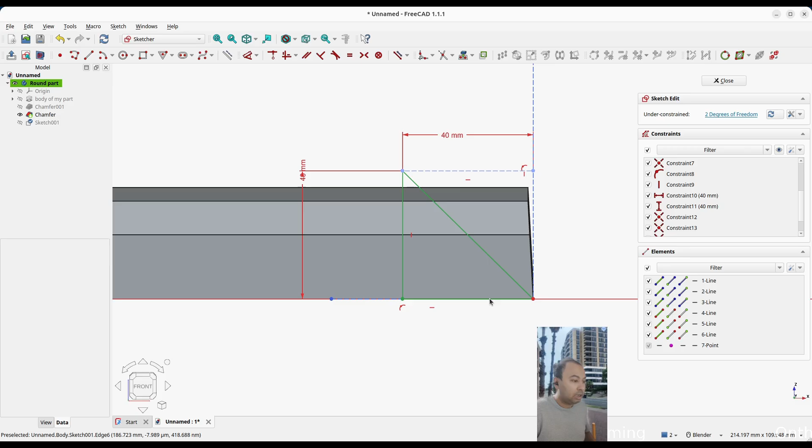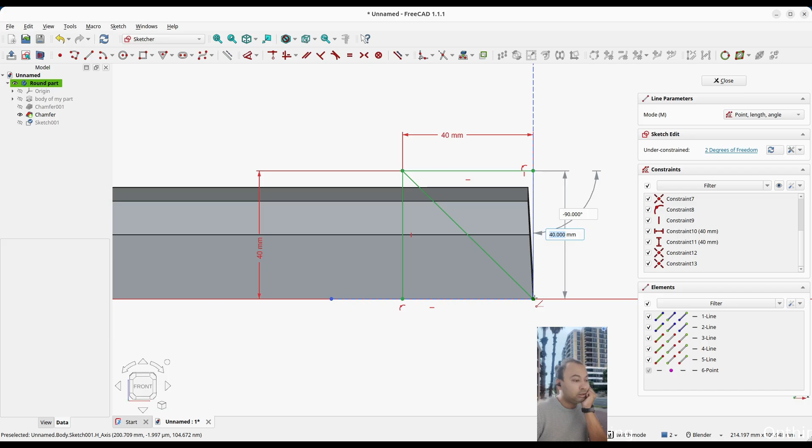We'll turn this into... actually this line is needed. I can select that line and delete it, just like that. Let's select this line and then toggle to normal geometry, then create a line, coincident to this point, coincident to this point. And let's turn this line to construction geometry.

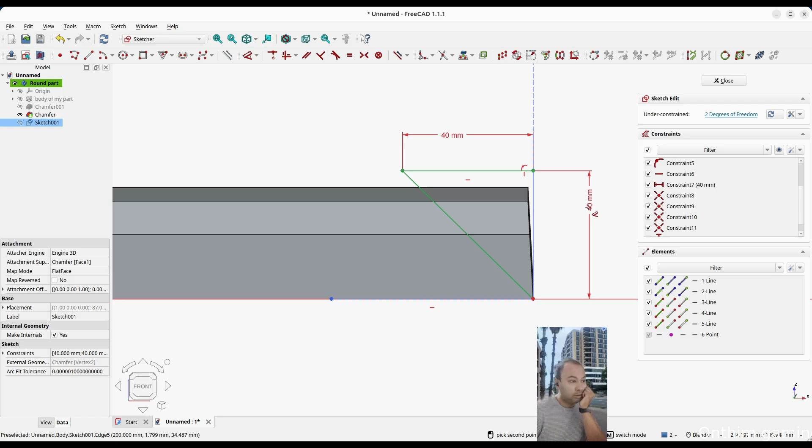This line is not needed because we can define this based on this. So we can select that line and delete it. What we have to do here is use the smart dimension, select this side and then set 40. And again, this is not needed - you can select that line and delete.

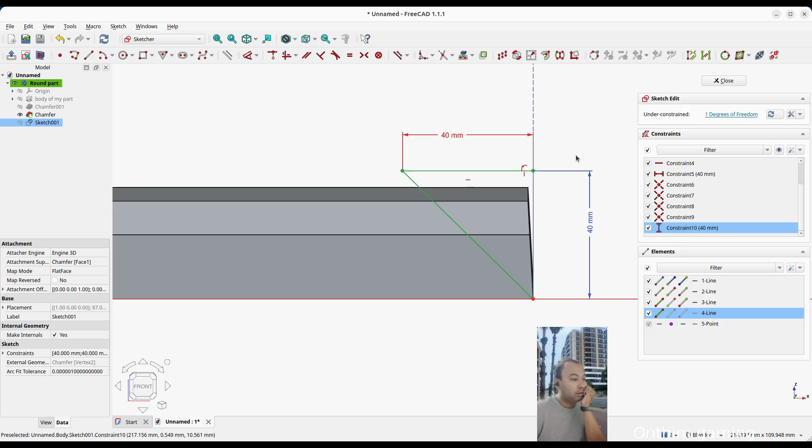And you can see this one - you see what is this one - which has a 40 constraint. That's good. I think this is enough. We can also delete this one construction line.

So let's make this one vertical. As soon as I made it vertical, you can see it all changed to the green color - that means it's fully constrained. I can exit the sketch now.

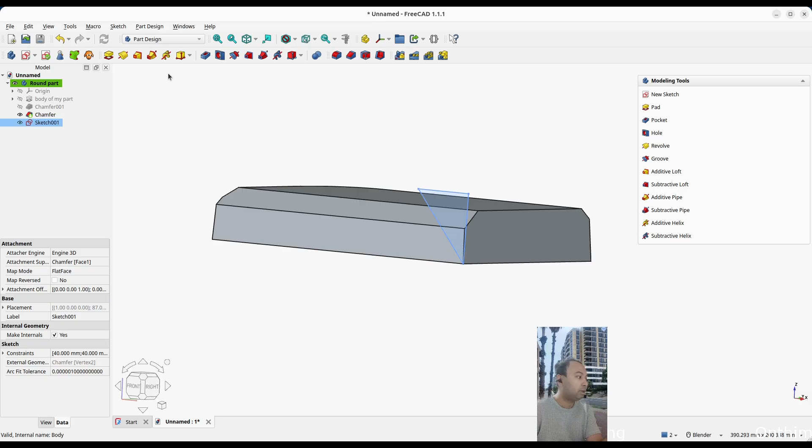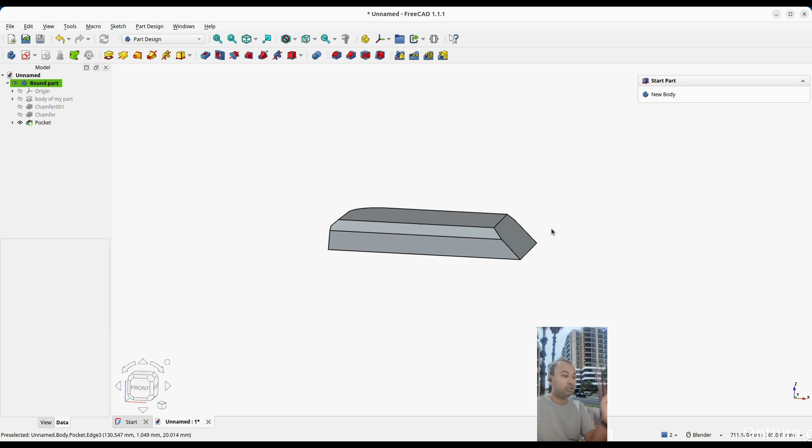While inside the part, what I can use is the drag to cut how far I wanna go. The dimension I'll set it to through all - it's gonna cut everything. Click OK. Now, as you can see, I have achieved the chamfer result, which is greater than the required amount.

So that's all for today, I guess. As you understand, this pocket just removes material, and this contains the final outcome of the body, and that's what is shown.

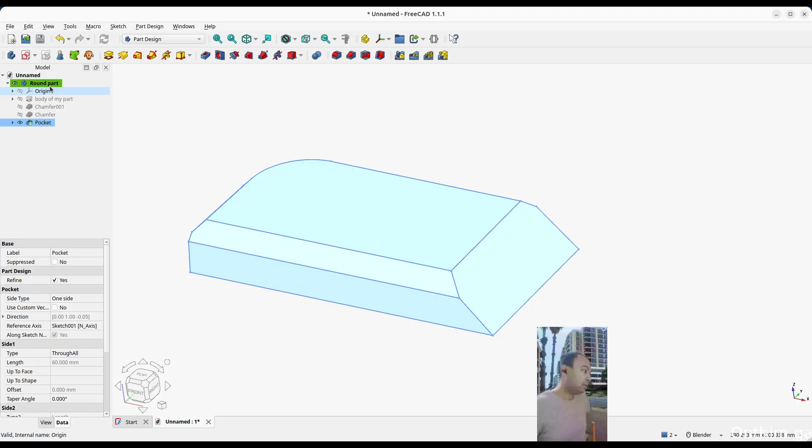In the project tree, you can see it, and you can just sketch the pocket, select the sketch. That's all for today - I guess you know how this works now.